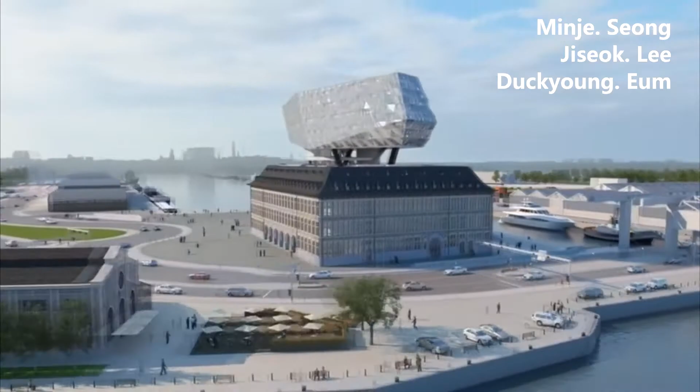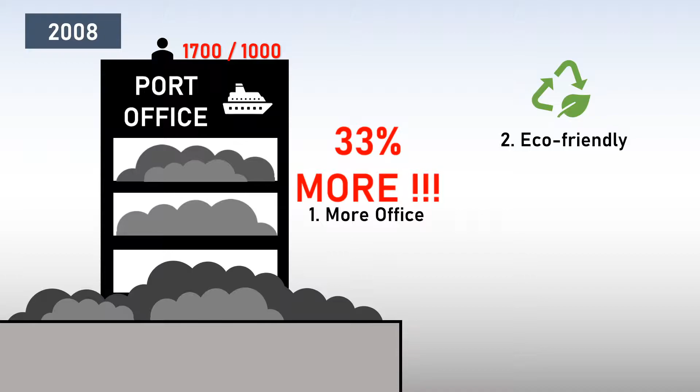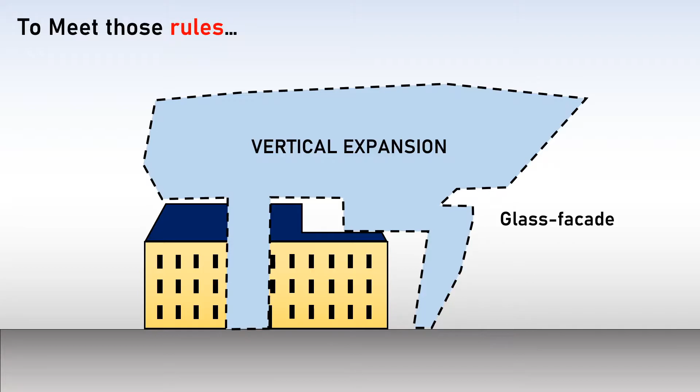We told you last week that the Antwerp porthouse was planned by the Belgian government. The challenge for construction companies and designers was to expand the building by about 33% to accommodate an increasing number of employees, while also thinking sustainably with eco-friendly construction. The most important challenge was to acquire an international image without destroying historical monuments that held symbolic meaning for the port. To meet those demands, the result was a vertical expansion with a beautiful glass facade design above the existing building. Now we would like to show you in detail how they managed to meet those requirements.

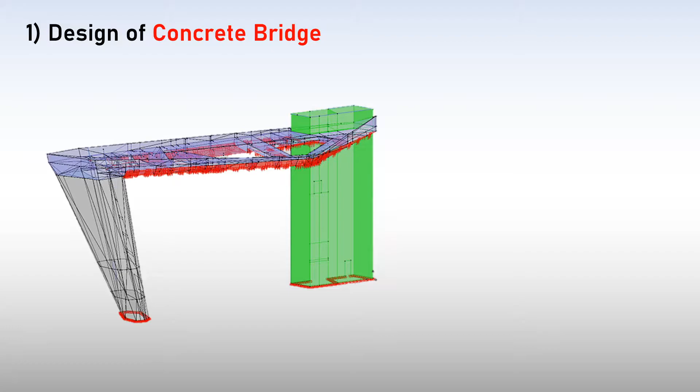The first thing we want to introduce is the concrete bridge and steel columns, calculated by SCIA engineers. The first challenge was the design of the concrete bridge. One part goes straight, but the other side is angled because it has to pass around the masonry structure. They discovered that a lot of torsional forces are loaded into the concrete cross-section, and informed the construction contractors how strong the concrete should be.

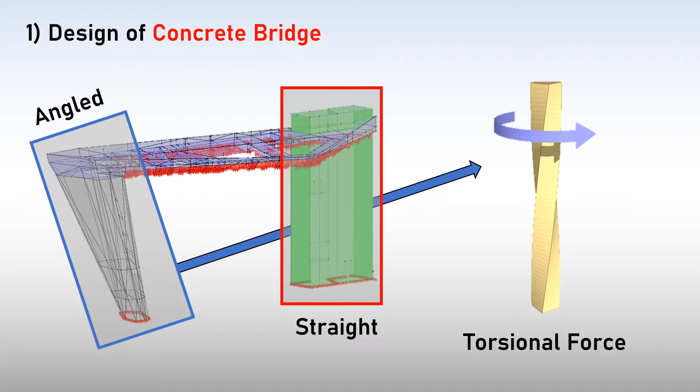The concrete ring supporting the superstructure consists of other elements like the sloping front leg, the bridge, and a concrete elevator and stairwell. The bridge is a platform between the substructure and superstructure. In the foundation zone, the front leg is coupled to the other concrete column by a connecting beam. There is a staircase in the sloping front leg.

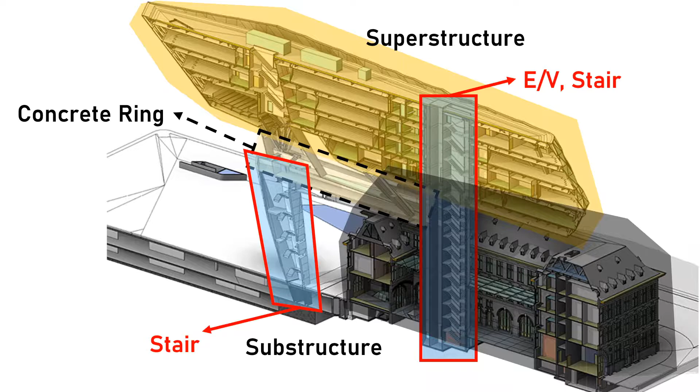The ceiling of the bridge seems to float. This is because the only connection between the front leg and the superstructure is a vierendeel cell, which transfers the forces of the lateral wind on the superstructure to the front leg.

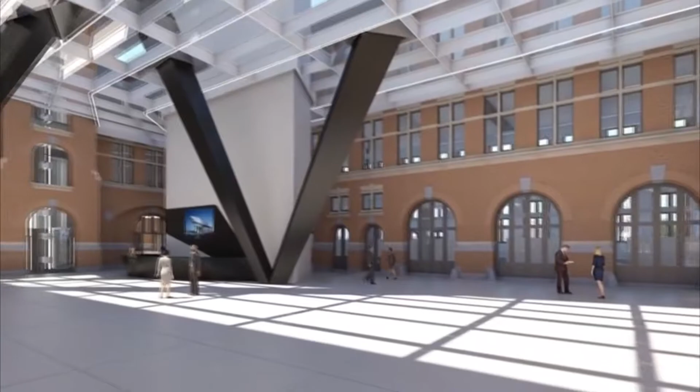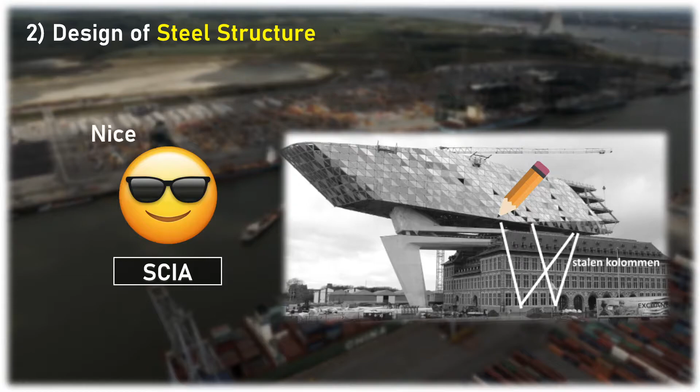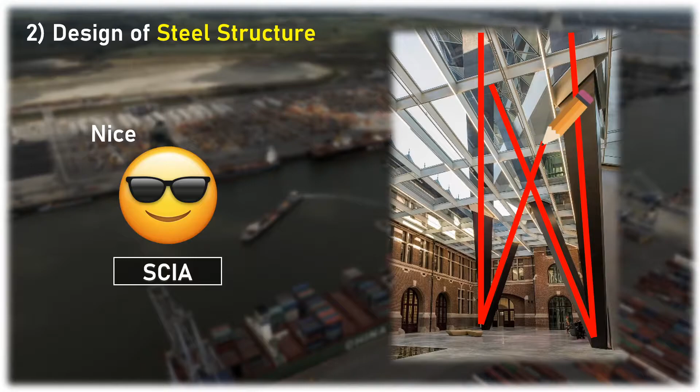After that, SCIA engineers had to design the steel structure. There was not a lot of space between the columns and the atrium roof, so they had to figure out how to cope with this. The steel columns in the atrium were modeled as beam elements with arbitrary quadrilateral shape. The folded paper clip consists of 4 steel hollow columns that rise in the atrium, puncture the roof, and support the new building. These 4 columns provide the lateral stabilization of the superstructure.

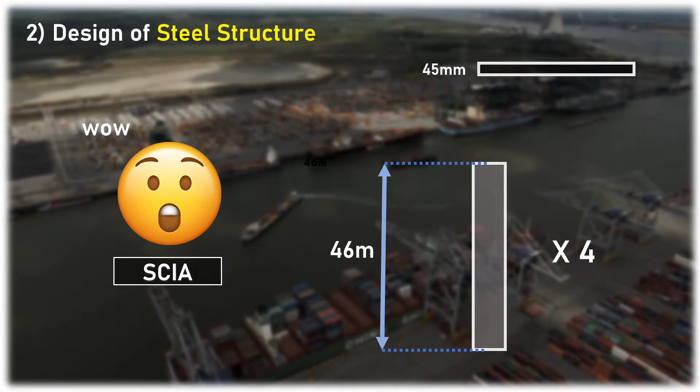The 4 black steel columns, measuring 46 meters each, are made of 45 mm thick steel sheet and meet at the atrium floor to form the apex. They then go out through the atrium roof and back inside into the superstructure. The supports are connected at the top by the concrete bridge, and below ground by a beam that runs between them, crossing under the southern wing of the existing building.

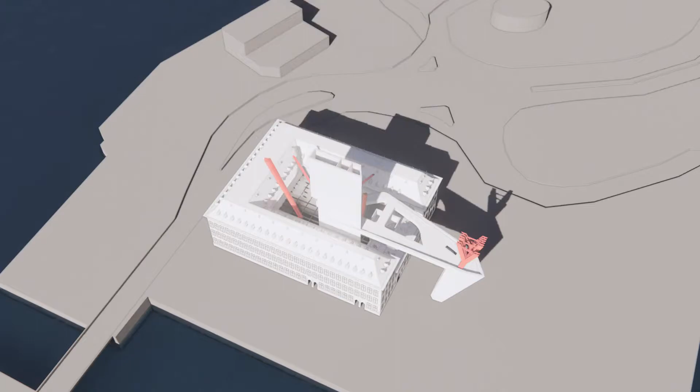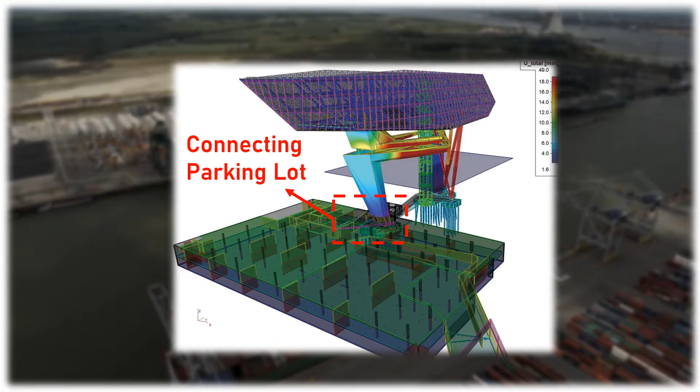In this way, a vertical ring of concrete is created, and this vertical ring is connected with the steel structure of the new building. As a result, the building's weight is supported entirely by a structure of concrete and steel. The main support is prominently placed in front of the building in the form of a sloping, sculpture-like concrete column that is anchored deep in the foundations of the underground car park.

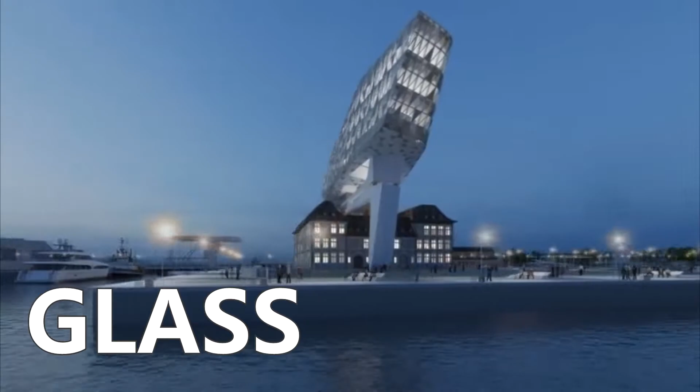Next is the glass structure. Needless to say, the triangular glass facades are a typical feature of the Port House. The triangles are arranged in such a manner that creates a diamond-shaped design representing Antwerp's diamond trade. So let's talk about who made them.

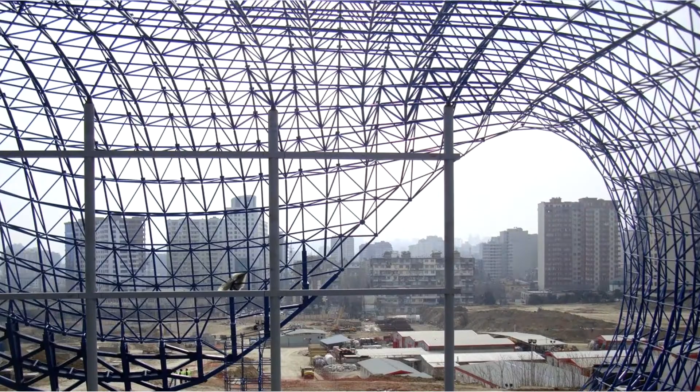5S is Gartner's trademark glass facade module system. The glazing is glued to stainless steel frames. The prefabricated modules can be attached to all kinds of structures. The system offers complete freedom in the design of the facade and allows a wide choice of materials.

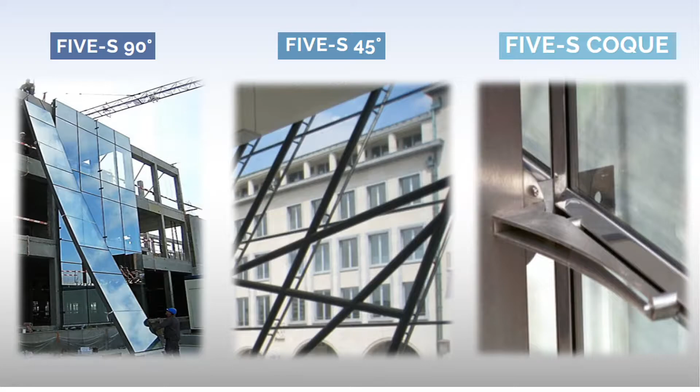With 5S45, the stainless steel frame is attached to the structure by means of cylindrical stainless steel spacers on spiders, or directly onto the support structure. This can be placed on a rear-ventilated type structure, and a secondary support structure is not required. 5S Coque is based on the 5S90 system and its clips.

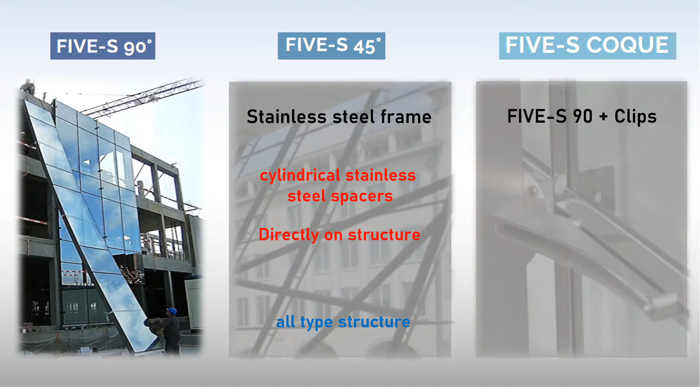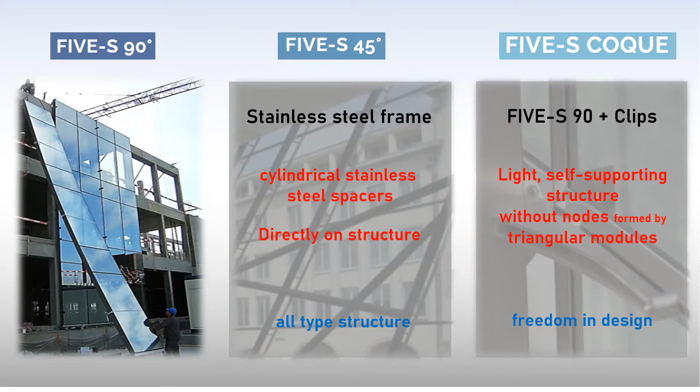The innovation consists in working with a light, self-supporting structure without nodes, formed by triangular modules. This offers total freedom in design of facade and domes, and can be applied to facades in all kinds of specific shapes. The glass structure made by Groven Plus Saint-Gobain carried out the actual work.

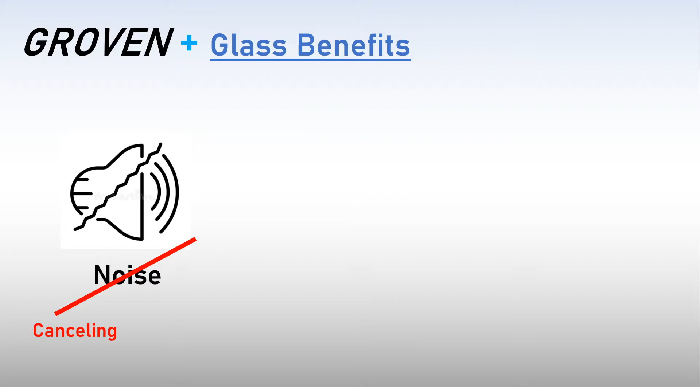Groven Plus transparent and reflective glass gave 3 benefits to the building. First is noise: the facade of the new extension has modern noise control glazing, which keeps intrusive noise out, providing the tranquility essential for working and living.

Second is privacy and comfort. Spandrel glass was used to prevent materials or construction elements from being viewed from the exterior of the building. It is also colored and has opaque glazing, extremely stable over time, for an aesthetically clean appearance and uniformly colored panels.

Last is high solar gain. It has a high level of solar gain and contributes a high level of light transmission and optical quality.

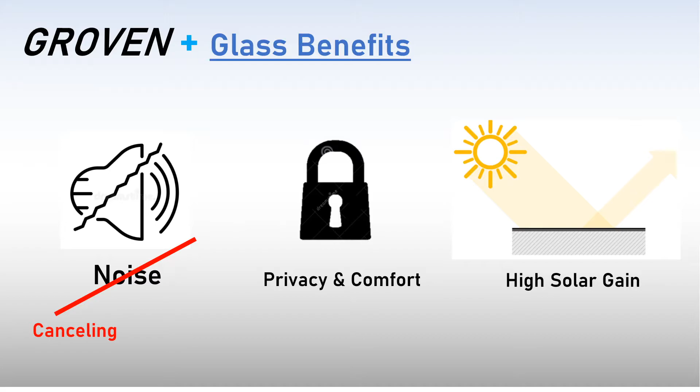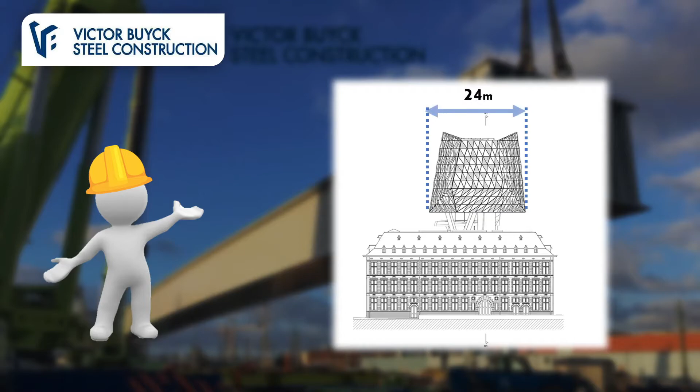Victor Buyck Steel Construction is responsible for the construction of the new 1500-ton steel structure, which is supported by 3 concrete pillars. It is 111 meters long, 24 meters wide, and 46 meters high.

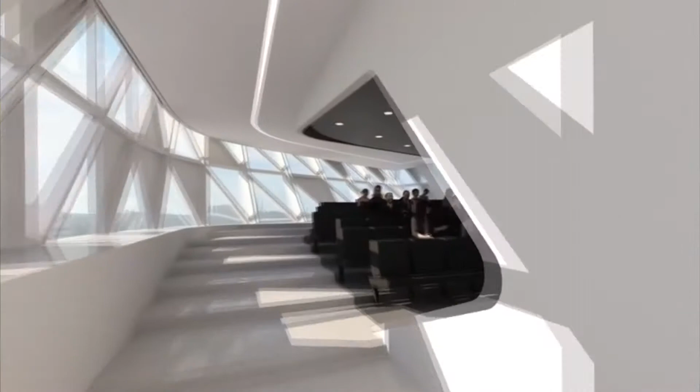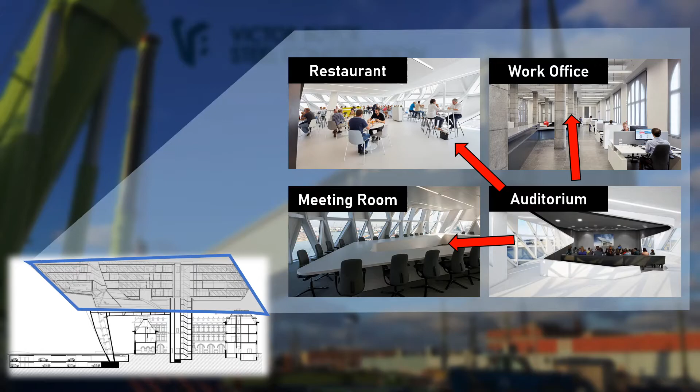The new extension adds 5 new floors to the existing building. It includes office space, an auditorium, a restaurant, and meeting rooms. The building has an open plan with facilities organized around a central atrium, which provides direct access to the offices, meeting rooms, and public counters of the existing building.

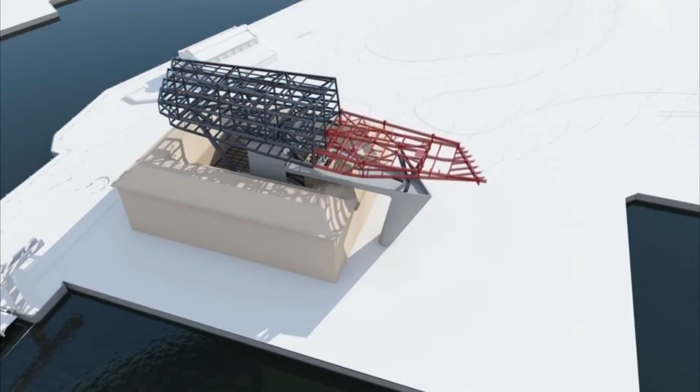The concept design is a free interpretation of a beam-shaped volume raised above the existing fire brigade building and supported on 3 sculptural concrete pillars. The beam-shaped volume and the 3 concrete pillars were constructed in 2 separate processes.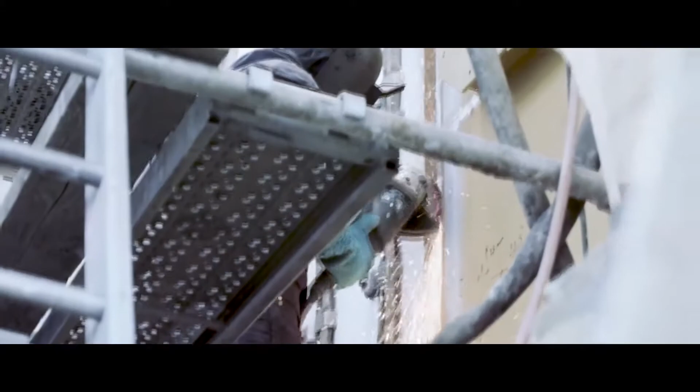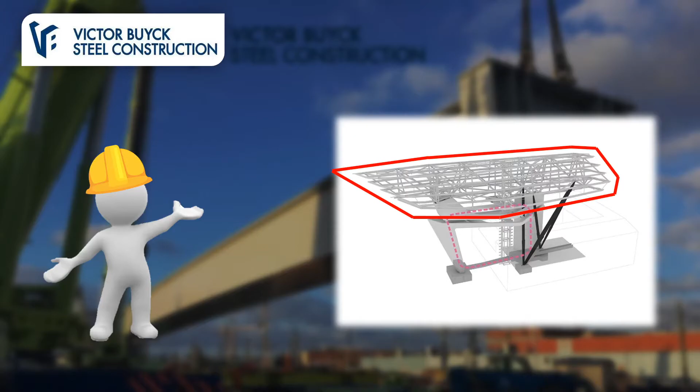VBSC has lots of experience in the engineering, fabrication, transport, and erection of huge steel constructions abroad and at home in Belgium. Based on the know-how of their engineering department acquired over the years, and the fact that their large covered work surfaces have water access, VBSC decided to build this special building in a modular way, in 6 large pieces.

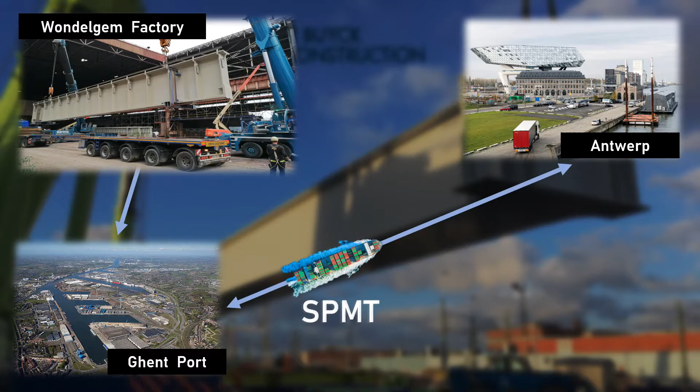These 6 pieces were manufactured and pre-assembled in the Wondelgem factory and transported over water from the Port of Ghent to the Port of Antwerp. Due to this approach, VBSC reduced the on-site installation time to a minimum.

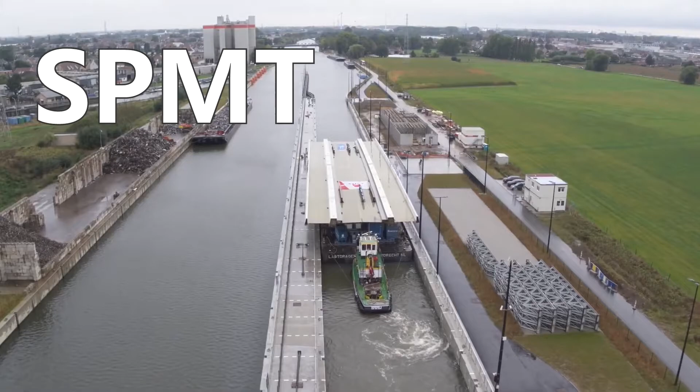On arrival, the structures were rolled off the barge using SPMT and were lifted up onto the already constructed concrete pillars by cranes, which were owned and operated by heavy lifting specialist Sarens.

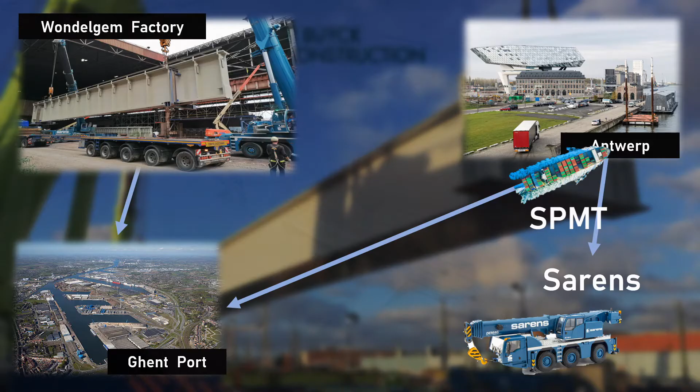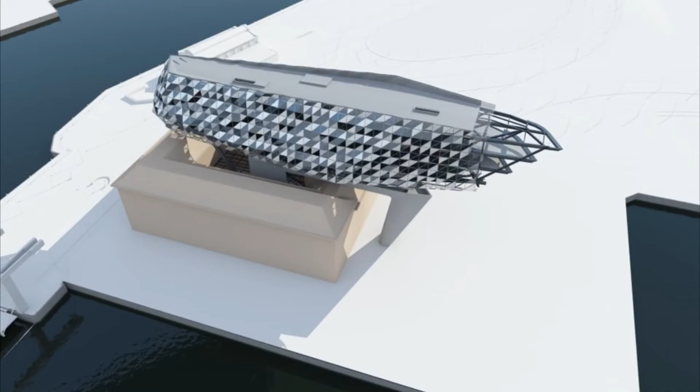The 4-story extension is designed as a torsion-resistant steel frame and consists of a roof and floor structure with an intermediate truss and 2 angled lateral and partly sloping facade trusses.

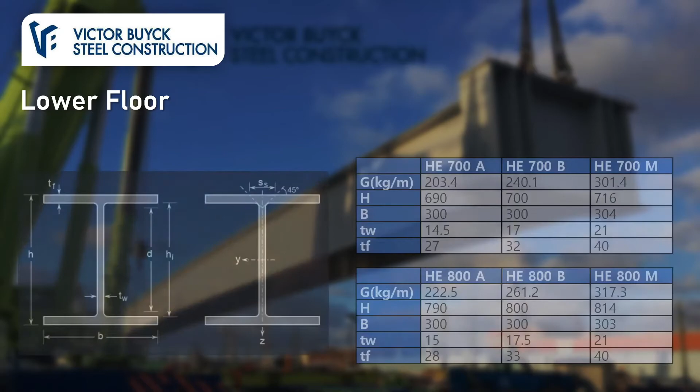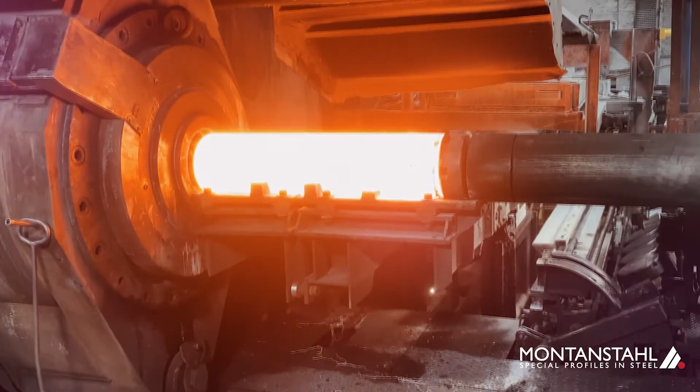The lower floor is suspended from 3 longitudinal structural members composed of HEA, HEB, HEM sections and diagonal HD 400 columns. The use of steel profiles is characterized by high flexibility of composition and fast, cost-reduced construction.

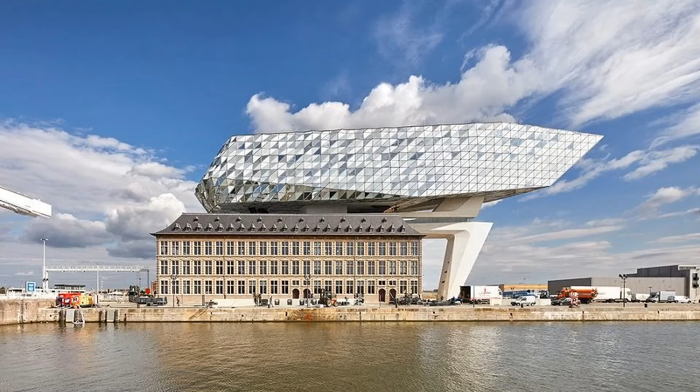In order to combat the strong winds at a height of between 28 and 48 meters, an additional bracing system consisting of 4 transversely placed stringers adds stiffness to the structure.

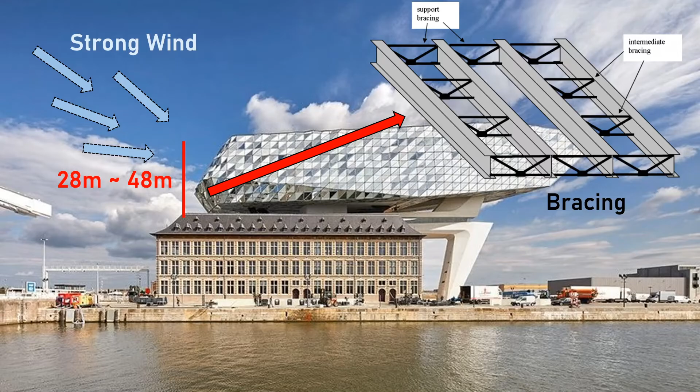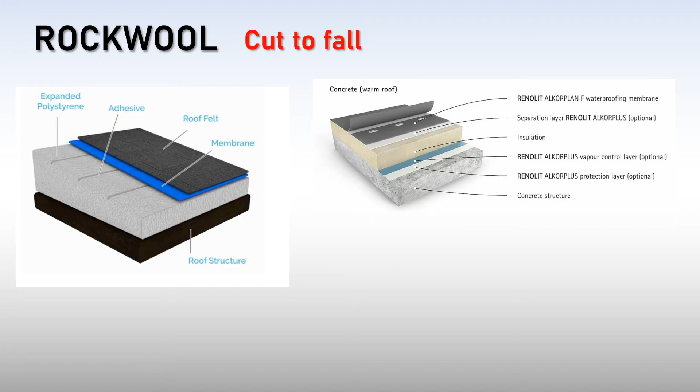We can learn about the drainage system from roof manufacturers. Rockwool is the world's largest maker of insulation materials. Rockwool's cut-to-fall service precisely custom-shaped the roof insulation, so it could be installed quickly on the complicated boat-shaped surface while still ensuring the roof drained properly.

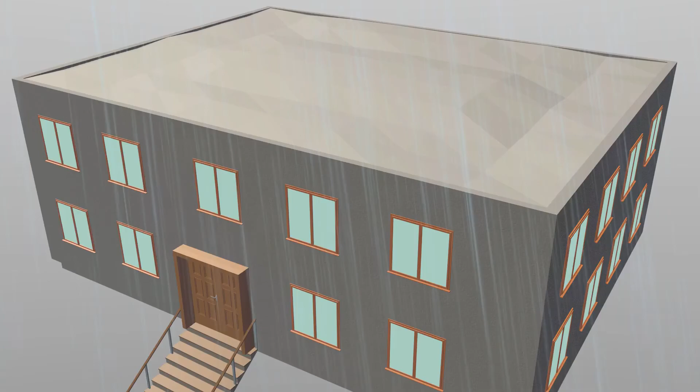Cut-to-fall is an external insulation system that puts a slight taper onto a flat roof. The taper is designed to enable rainwater on the roof to drain to the outlet position wherever it may be. Through using simple, standard-sized tapered boards, the roof can effectively shed water and eliminate any undesirable standing water.

This time, we investigated the challenge of Port House building construction and explained how each company participated in the construction. Next time, we will come back with more interesting information. Thank you.